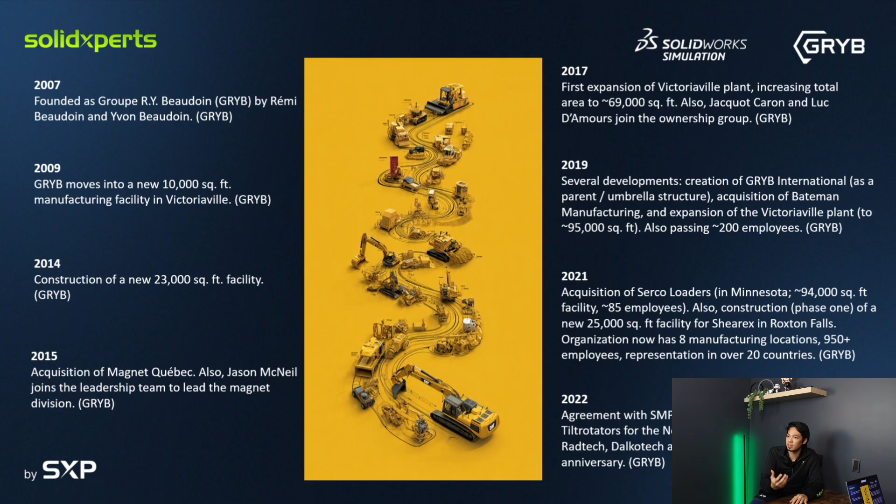15 years ago, I was still in high school, just for a little history there. But I think that speaks volumes about how much they trust their solution in SolidWorks, as well as how much they trust SolidXperts as a partner in all of their endeavors.

So anyways, Chongping, I'll let you take it back with the case study here. Sure, thank you, Michael. All right, so case study. Let's have a look at this picture.

You know what, Michael? Winter is coming soon, right? Yeah, and I'm a little bit scared. Same, it was pretty bad last year, so I'm hoping it's not the same this year.

But guess what? We're saved. Oh yeah, because of Gryb. They develop products like these to help.

So let's talk about this model here that we're going to run a finite element analysis on. It's a directional snow plow, and it's recognized for its robustness, reliability, and efficiency.

So actually, I asked Gryb to give me one of their 3D models. Okay, well, actually, it's this one. This one is a simplified 3D model.

And you know what, Michael? I like what I see here because I know that Gryb knows the rule of thumb: they clearly know that they don't need to take the whole 3D model to run the analysis. They're also thinking about how long it takes to run the whole analysis, so they aim for the best possible approximations of results they can get. Simplifying the model is a must.

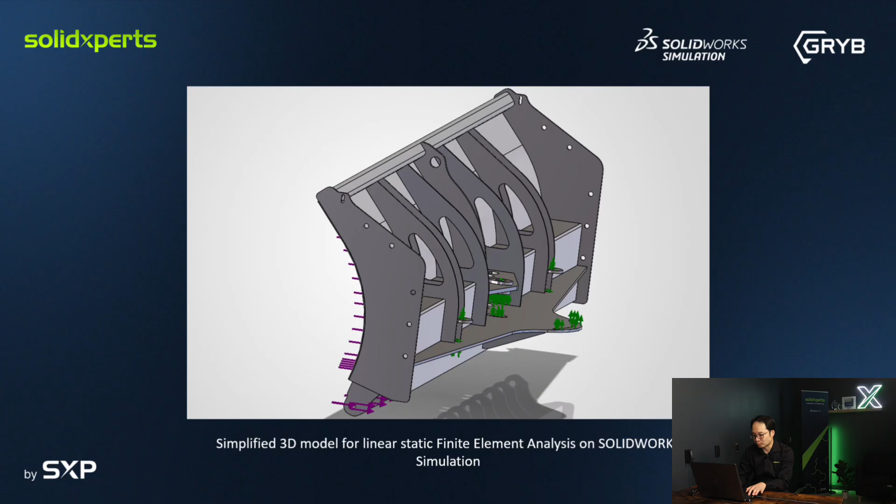So I will walk you through the analysis they did here with SolidWorks simulation. Clearly, they followed one of our trainings. Absolutely they did, because we always have some tips and tricks to share and everything.

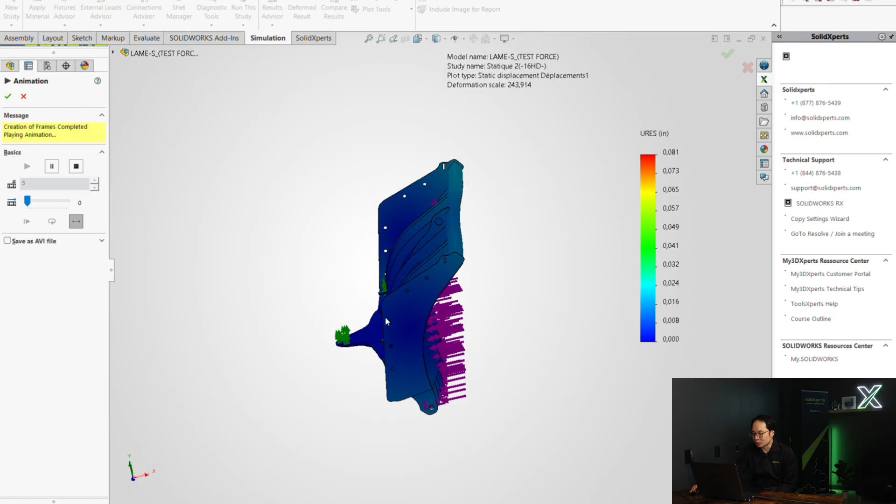So what you see here on the screen is an animation of the 3D model when it's deformed, because we are fixing here the holes on the back, and we have a force applied on the front. So this is simply an animation so that we can get the displacement results, deformations as well, constraints or stresses, so that we can evaluate the factor of safety.

But let's see how this analysis was created. So from a simple click on the new study, we can right away transfer the whole model from the 3D model to the analysis. Here we have 44W, which is a material that is used a lot in Quebec.

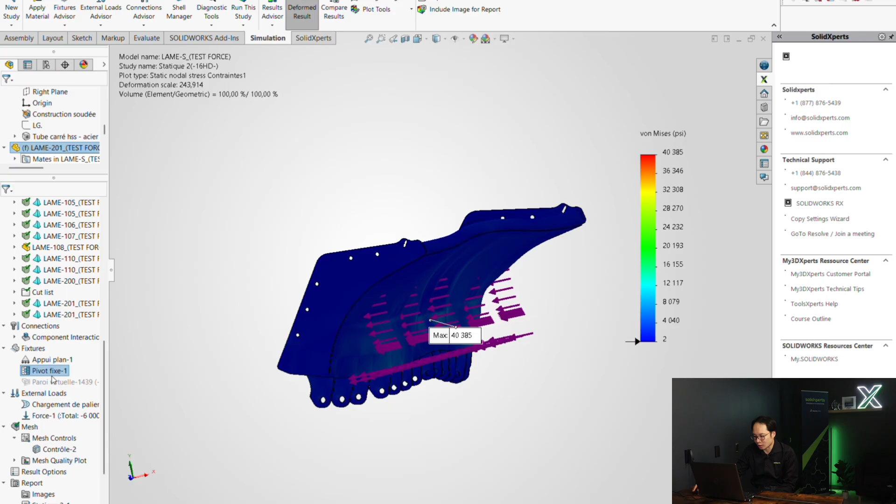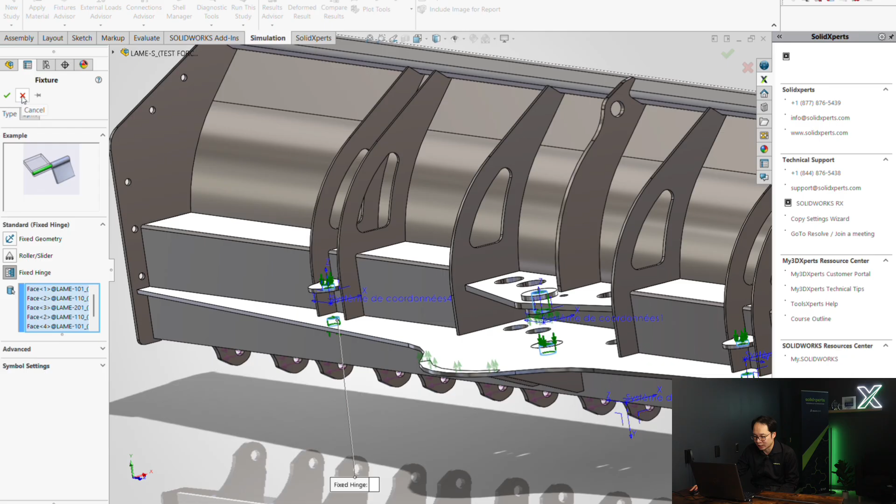Let's just have a look at one of those features to see how a fixed hinge was applied. We simply just select the holes here, and we specify that we have a fixed hinge. What I like a lot about this software, Solidworks Simulation, is how intuitive it is. We have some examples here that show an animation of what exactly is going to happen, so when the user applies this feature, he knows exactly how the model will behave. This way we can quickly create the analysis.

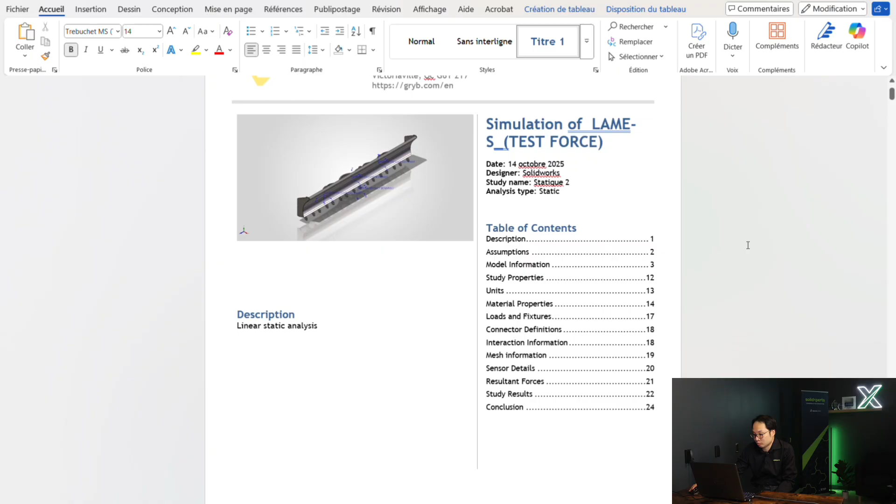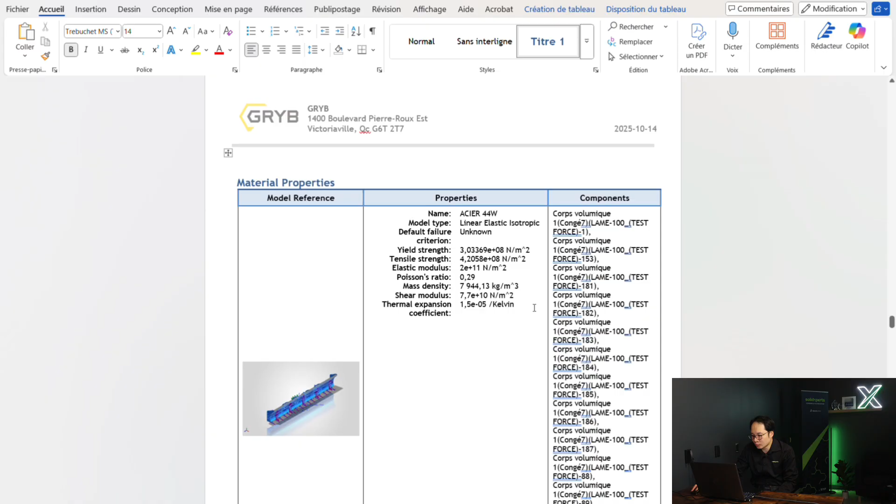We have 2 additional features here, 2 loads applied to simulate the load, and then we get the results. Additionally, we can also get a report at the end of the analysis. From one click, we generate this report that can maybe take hours to create manually. So under a few minutes, this here is done. We have a table of contents, and we can click and jump onto the material properties section. In fact, this is like a summary of the whole analysis, including the results. So it saves a lot of time here.

All right, so let's keep watching Jonathan as he talks about the benefits of Solidworks Simulation.

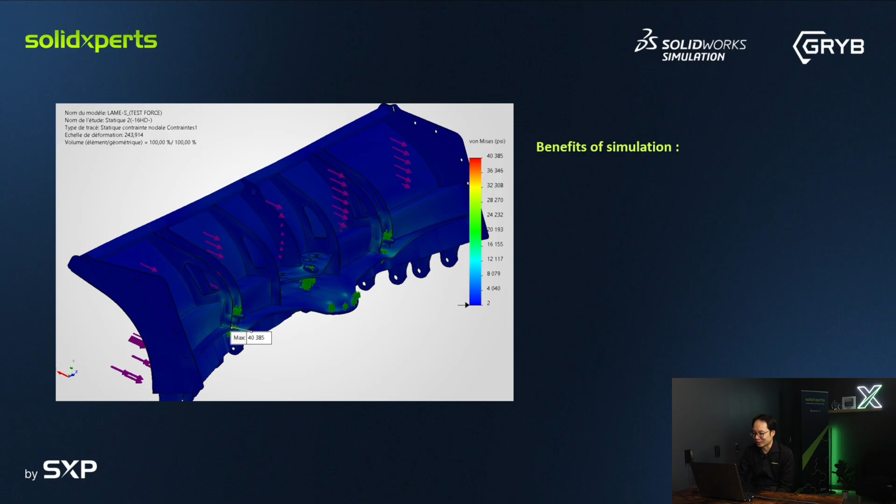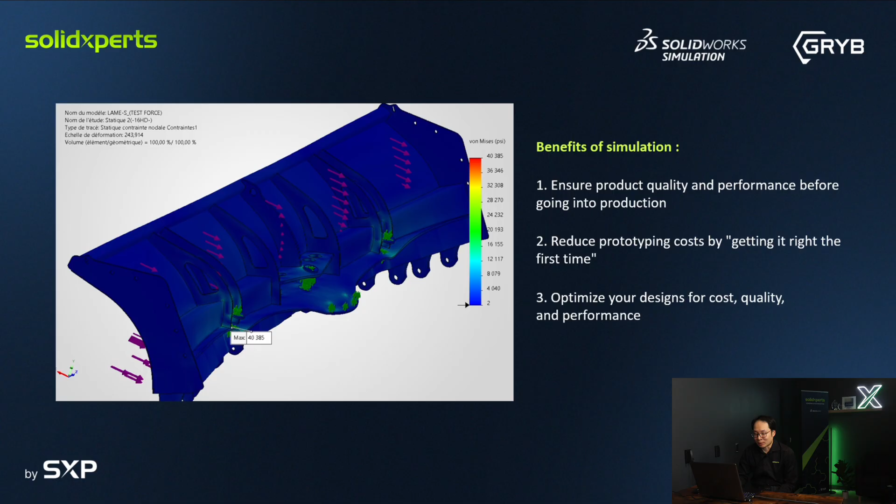With Solidworks Simulation, we ensure the product quality and performance before going into production. It helps reduce prototyping costs by getting it right the first time. We remember that Jonathan talked a lot about optimization, so why not optimize your designs for cost, quality, and performance? And he also talked about time, so shorten time to market is one of the benefits of Solidworks Simulation.

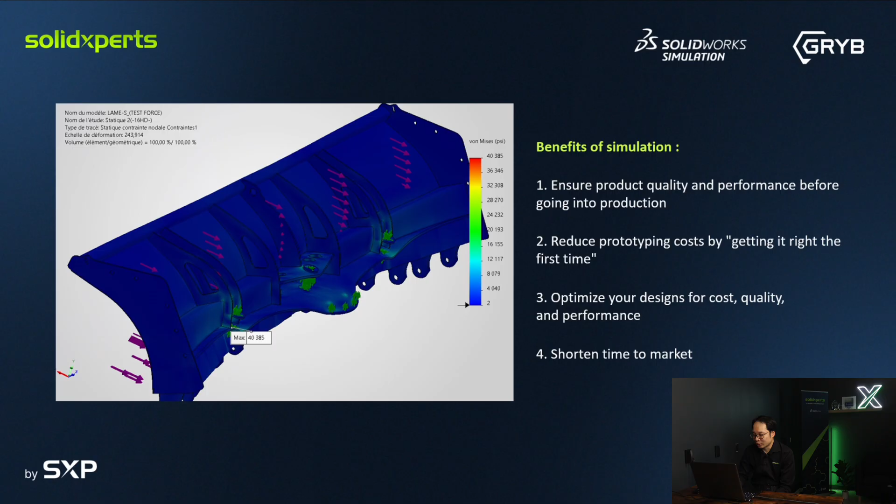All right, so this ends the 3rd part. We are now at the conclusion. So to conclude, nothing special, I just wanted to talk through a summary, let's say.

So we talked a little bit about Gryb and who they are, right? They develop a bunch of different attachments for heavy machinery, whether it's buckets, blades, or backhoes, Gryb is who to go to for that. And we talked about some of the issues and challenges that they face and why they adopted Solidworks Simulation to meet those challenges head on. We even took a look at some of the more nitty-gritty details in SolidWorks and what a simulation study actually looks like. So thank you again for that, Chung Ping.